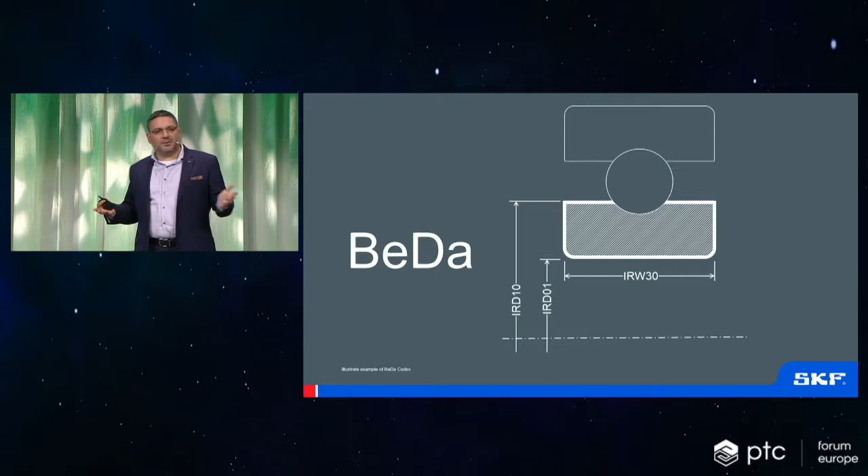We need to start rethinking about our products and our process information across the entire value chain. So in this diagram is a very simplified view of what we do. So let's start on the left-hand side. We start to reuse this information to support our customers and our sales process. This information then is also digitized during the engineering processes and then passed on to other key systems that allow us to plan the manufacturing of our products.

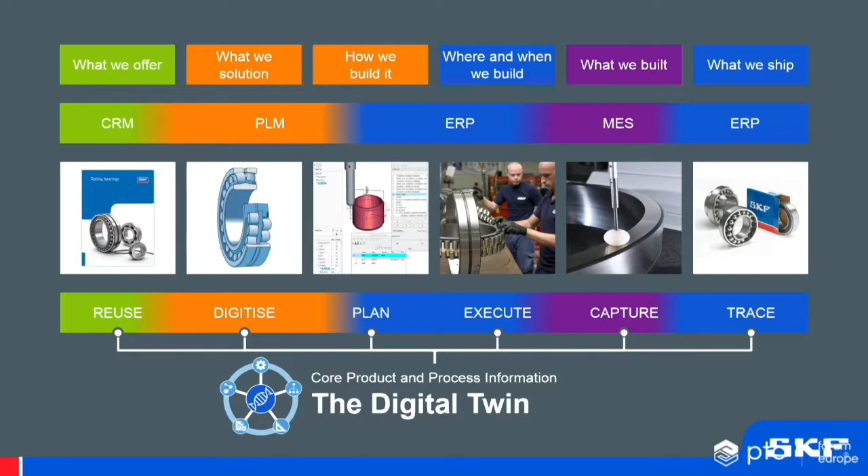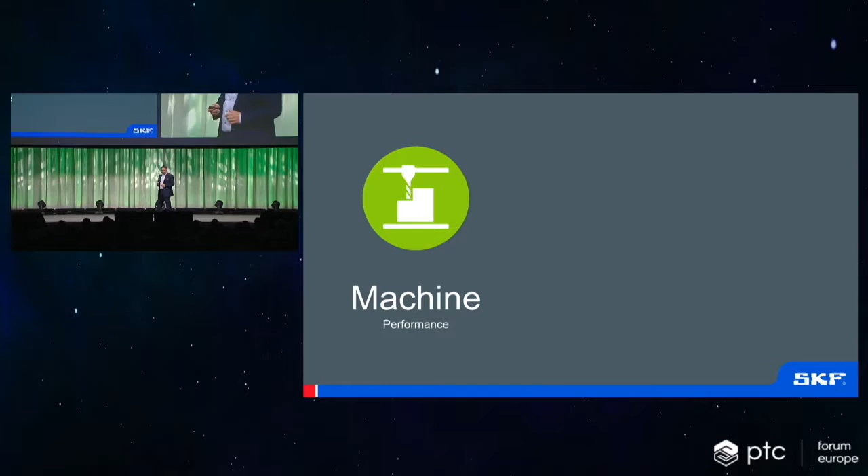So how did these changes actually come about? Well, as I'm sure many of you know, when you start defining factories, you tend to start with the manufacturing process and the machines. You focus on machine performance as the primary driver to defining the factories. But we quickly realized that machine performance alone was not enough to deliver Industry 4.0. We had to somehow turn that light on in the factory.

For Industry 4.0 to work, we had to ensure that we had the right information to drive the machines. We had to have the digital twin to support the factory. We had to connect that information down to the machines, and we had to collect the information to support the creation of the digital twin.

So let's go back to the digital twin. Here she is. Today, we are building our world-class manufacturing capabilities on this blueprint. We're starting small, but we plan to scale fast around these implementations. In the last 18 months alone, we have announced investments totaling 500 million SEK in world-class manufacturing. And the first factories going live with a digital twin will go live next year.

So to start with, we need to connect. We need to distribute that information of the digital twin to the people that need to use it. We need to integrate that information to the business systems and connect it down to the machines.

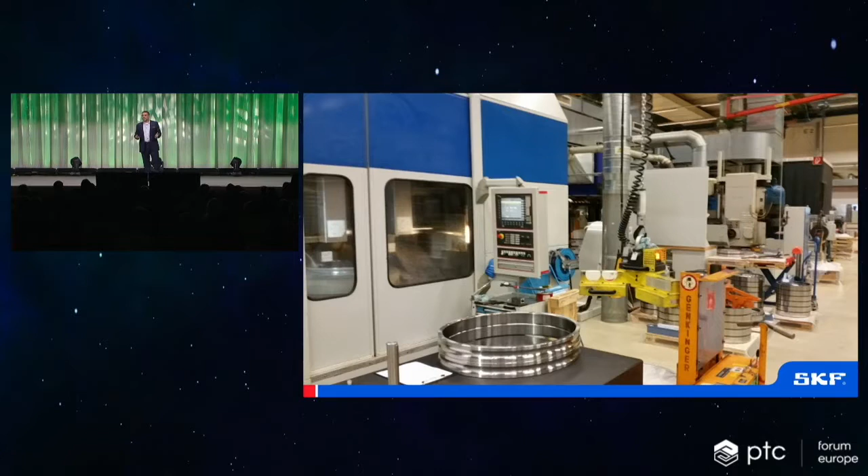That was actually one of the inner rings being machined two weeks ago in one of our factories in Germany. So you can see from the video that this is real today.

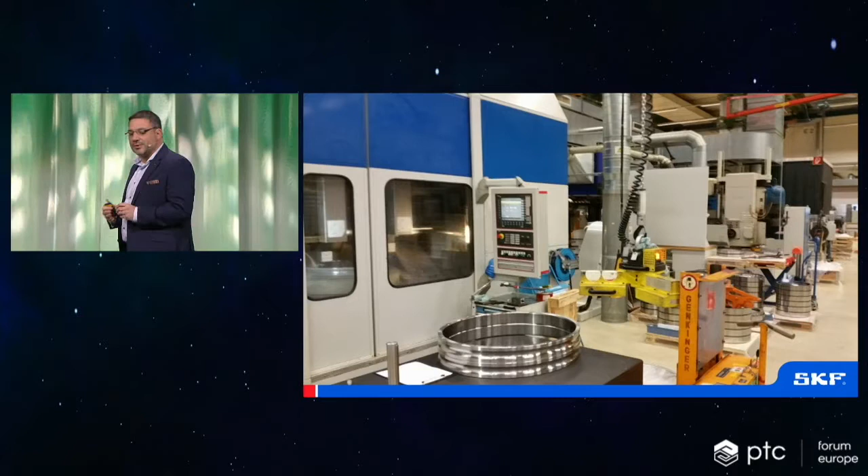But where will we go tomorrow? So this is actually the same shop floor you saw in the video a few moments ago. So let's put on our augmented safety goggles, and they have to be safety goggles if we're on the shop floor, and see the digital twin through different people's eyes.

So you'll see here, we're just showing some level of augmented information available to an operator. We will increase the level of sensors on our machines, and this will allow us to provide more feedback to the operators on the shop floor working those machines, providing that information in real time about the performance of the process going on.

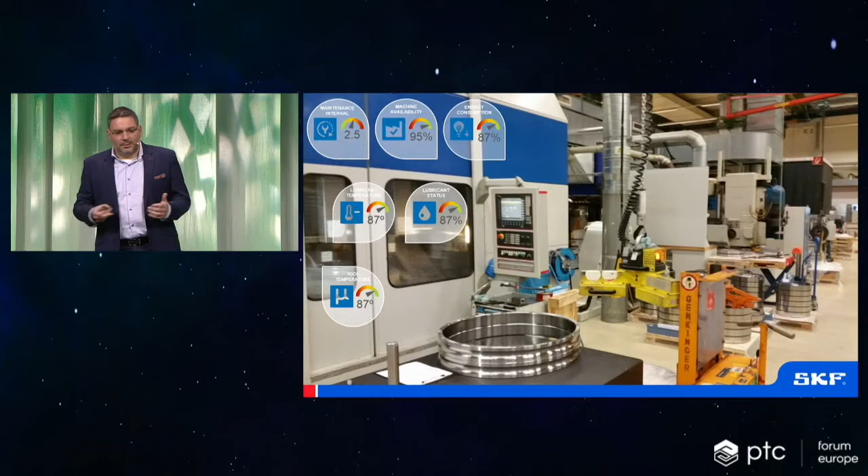Above that, you'll see some more information. Now, we can then start looking at the overall machine performance, the OEE information, and the maintenance status can also be shown.

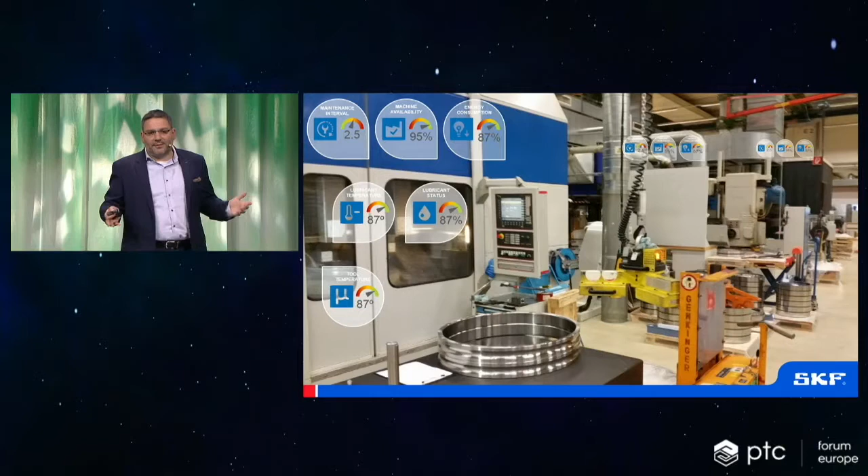Now, if I'm a production engineer, it's not just the one machine I need to look at. I need to look at the entire shop floor. So as I walk down the shop floor, I can see each of the machine's status and the KPIs provided without having to go to each machine, checking paper, asking the operator how things are going.

Also, we're connecting more and more data around the bearing and embedding that in the components themselves. Now, using that same technology, we're able to provide serial level specific information of the bearing itself. So, for example, if I'm a quality engineer, just by looking at the component, I will be able to see critical-to-quality information and performance about the components I'm looking at.

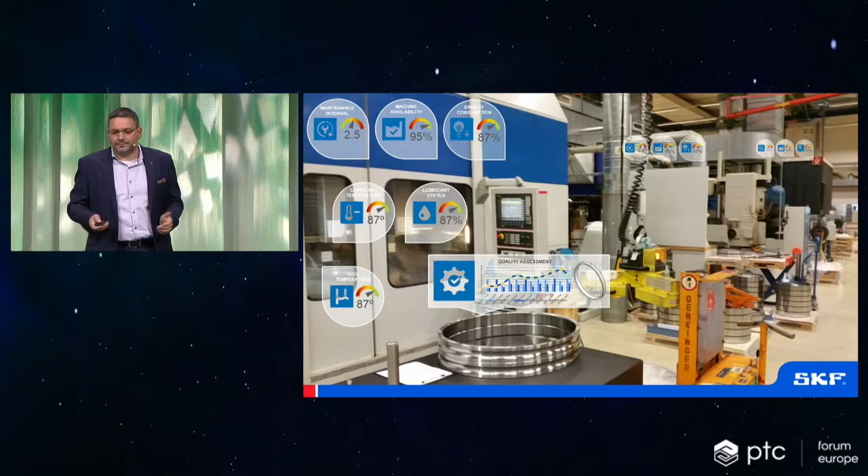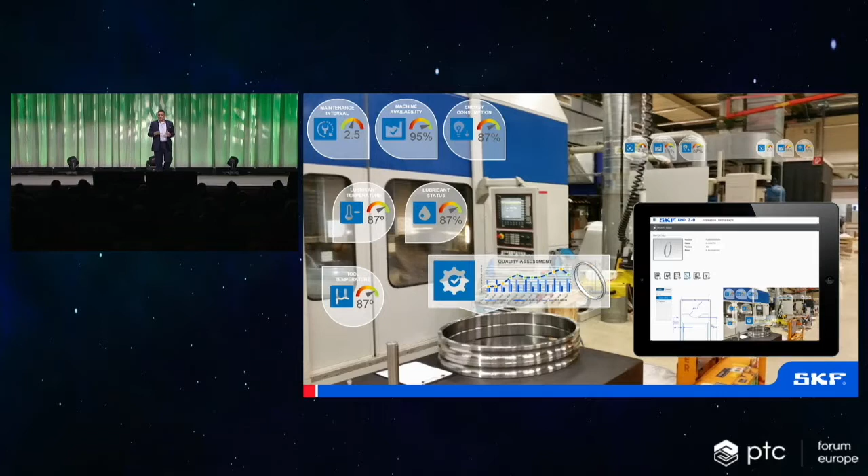Now that's wonderful. I'm sitting there on the shop floor with my goggles on, seeing all this information. But not everybody can be physically there on the shop floor. So that same information can be accessed remotely through many different devices in a secure way. This is where we are heading.

Now, to achieve this tomorrow, we need to implement a 4-stage approach. The stages are connect, collect, correlate, and collaborate. So let's just go and spend a moment to go into a little bit of detail.

Now, you've already seen in practice from the video and the previous slides where we have started with connect and collect. So now we add correlate.

We need to use the vast amount of information collected to make our processes intelligent. We need to provide analysis of that performance, and in the same way start to predict so we know when to take action to ensure world-class quality.

And with this new information, we can now collaborate. This intelligence will help us simulate both the product and manufacturing performance. And through this simulation and the information within the digital twin, we will be able to provide full product and manufacturing validation in a traceable and auditable way.